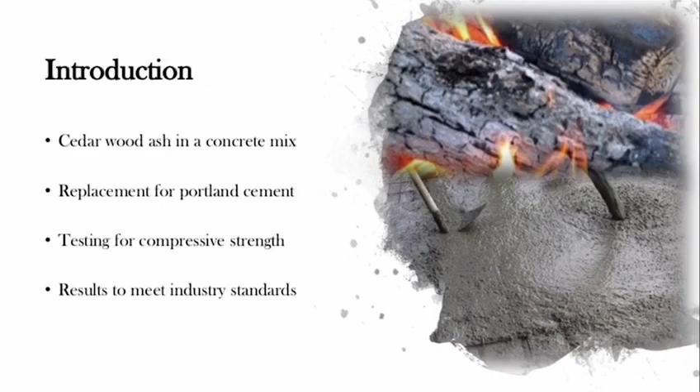This video is an overview of our project titled Wood Ash in Concrete Applications. Concrete has been a popular building material since the early days of civilization. It was originally composed of burnt limestone and sand. Since then, concrete mixes have been altered by many different ratios and additives for various applications.

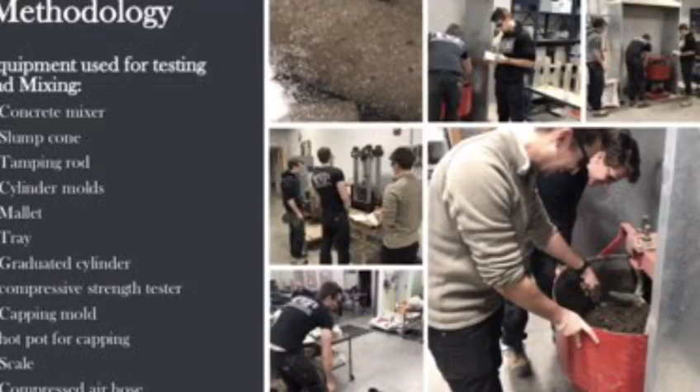For our project, we based it on the use of fly ash in concrete. The concept was to use ash collected from burnt wood that is composed mostly of bottom ash, as it is much more abundant than fly ash.

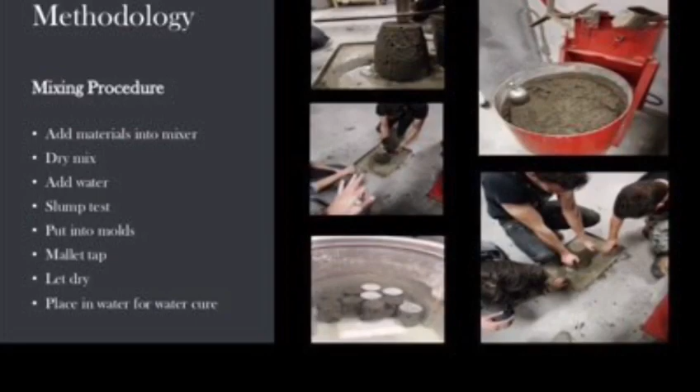When used as a replacement to Portland cement, the ash failed to act as a suitable binding agent, and the result was a concrete with a strength less than 1 MPa. We also found that as an additive, it forced the concrete to retain more water to achieve the proper moisture content and reduce the overall strength, but ended up leveling off around 10 MPa.

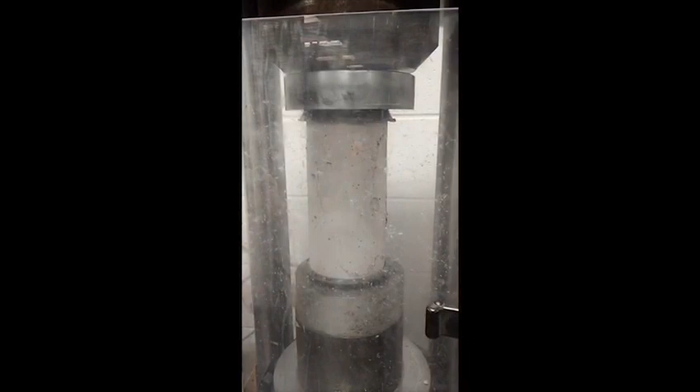Due to the reduction in strength caused by the ash, the concrete fails to uphold the industry standards and is therefore unsuitable for concrete applications.

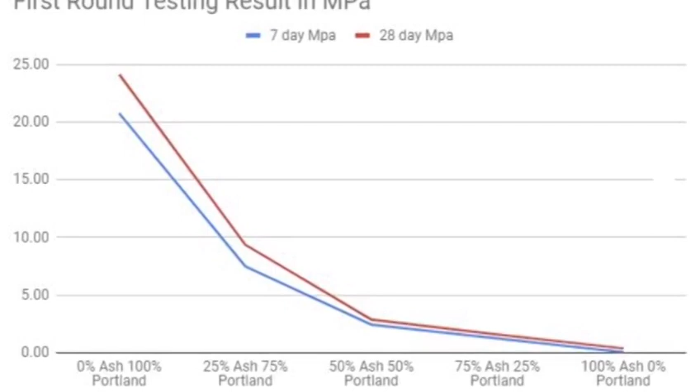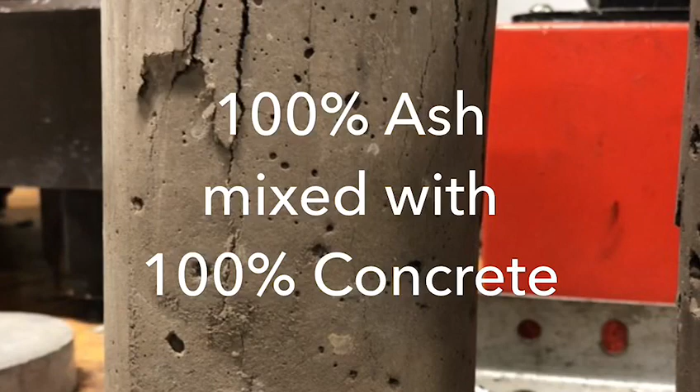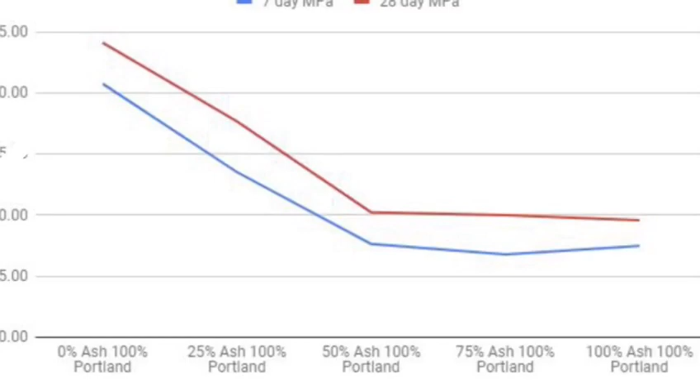To demonstrate the concrete strength, here are some brief demonstrations of the ash concrete. Wow. Whoa.